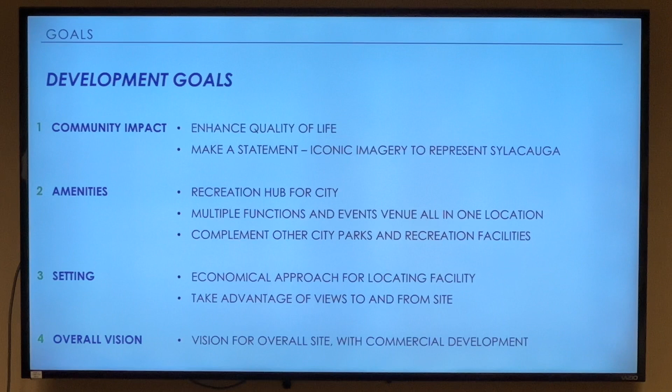Then from a setting perspective, we need to make sure it's an economical approach for the city and for where it's located—you'll see some of that in our thought process. And then take advantage of views to and from the site. The overall vision for the site, make sure we have an overall vision. One of the things we looked at was the potential for commercial development on that site as well.

So connectivity—if possible, extend walkable connections to and throughout the site. This is really part of an overall parks system, so making sure it has that feeling would be important. Vehicular access, make sure it's safe and easy to understand how to get to the facility, with adequate parking.

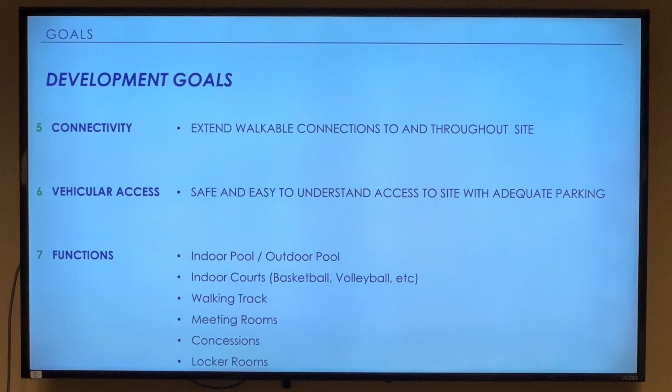Then lastly, some of the functions—we have a whole spreadsheet with square footages, but at a high level, looking at an indoor pool with an outdoor pool that could be in the future or now, but planning it so it could be implemented at any time. Indoor courts that would serve primarily basketball and volleyball, though it could serve other things as well. Walking track, meeting rooms, concessions, locker rooms, as well as associated administrative space, support space, and storage.

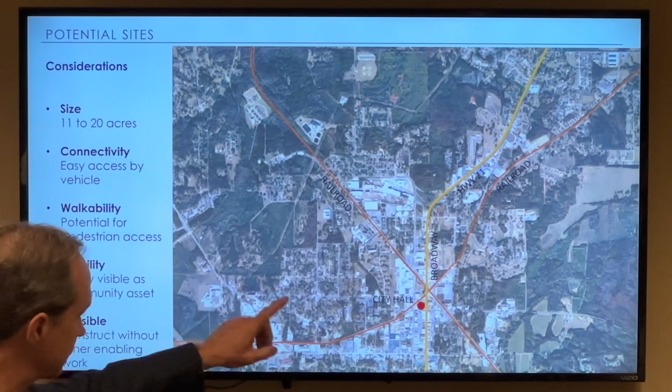So when we looked at development options and potential sites, this is just high level—this is where we are, the red dot right now, City Hall. Some of the things we looked at for this size facility, the square footage and parking we need, is acreage of 11 to 20 acres to really do something appropriate.

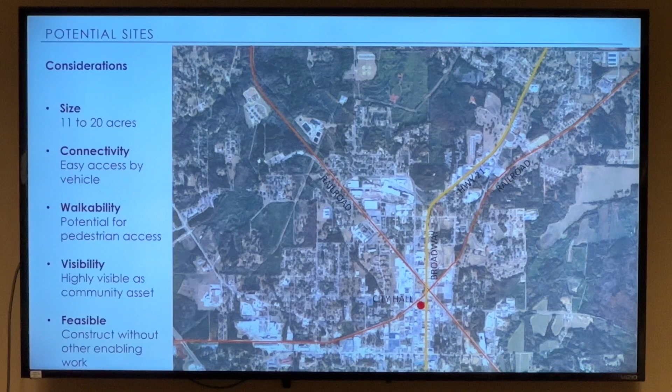The connectivity should be easily accessible by vehicle, with potential for pedestrian access, and should be visible as a community asset, hopefully something everyone would be proud of. Then feasible—it should ideally be feasible without requiring a lot of other enabling work, such as massive utility infrastructure extensions or things like that. That's part of what we mean by enabling.

So we looked at different sites, and as we talked about last time when we provided an informal update, we did look at this area just north of us at the turn of Broadway and 21, where Central Avenue is, as a study area. This is the large area in yellow that we looked at, and the development considerations and vision included community impact, access, visibility and prominence, making sure it can be a hub of activity, pedestrian connectivity if possible, future growth, the real developable area, and earthwork or development ease and cost.

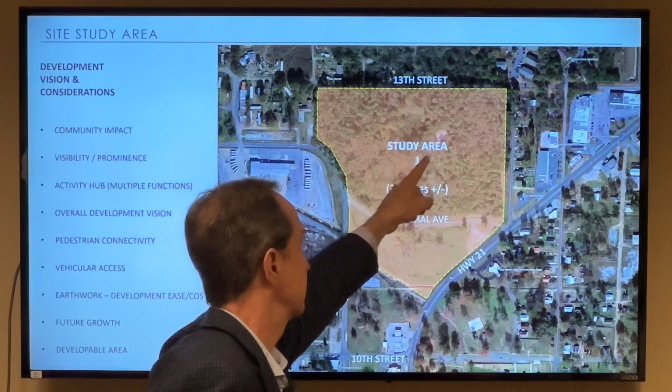So the first area we looked at was just north of Central Avenue, Central being right here. We did look at some of this area just south of it, but it's about 30 acres. What's interesting though is, as you know, there's quite a hill there—a big hill, this is the old water tank right there, and this is the top of the hill.

So once you get immediately north, or uphill, of Central Avenue, the site just starts marching up the hill. We did several studies looking at all of these considerations, how to fit the size of building with the functions we're looking at and appropriate parking, with future expansion space for an outdoor pool or outdoor play into this area. This is one of the schemes we did, where we looked at putting it just north of Central Avenue—it fits, it looks good. Then we look at a section cut through the site, which is what you see here.

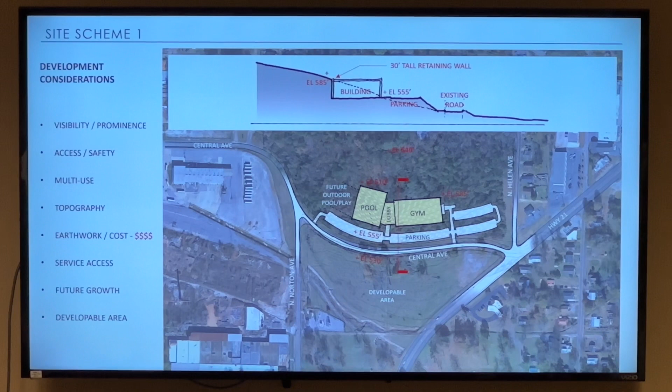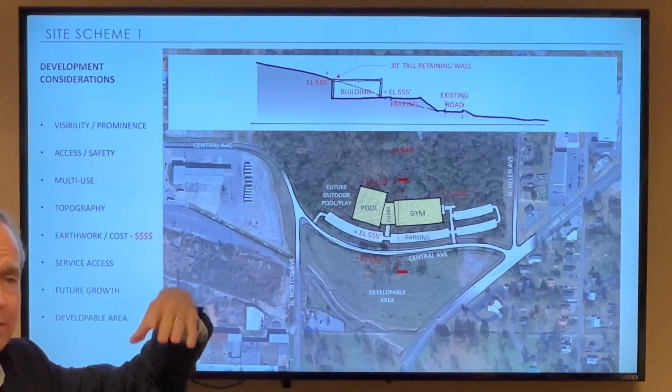And the wrinkle is we would be building into the hill. So we realized this is really expensive. Here at the back side, given the size and footprint of the building, we would be digging in and creating like a 30-foot retaining wall, say for the back of the gym or the back of the pool structure.

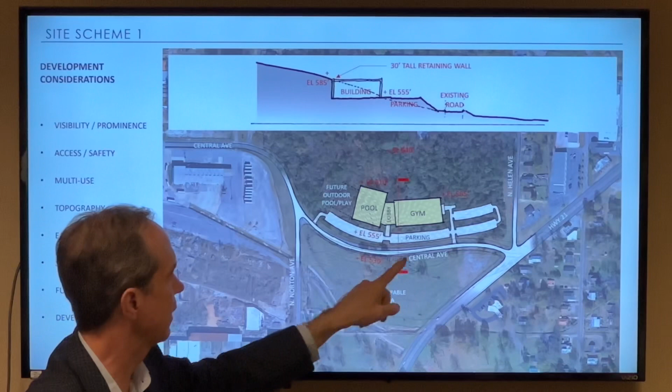And that would still only be to the top of the building. This is the existing road right here. So what we realized, we developed a lot of different schemes, but we presented 4, thinking surely there's a way to do this that would not be as expensive.

We looked at this scheme, or one similar to it, that was number 2. This one, actually, there's Central Avenue here, so we kind of pulled it down the hill some. But you still had a 25, 30-foot retaining wall.

Then we even looked at going on top of the hill and just slicing off the top of it. It's more earthwork, but you create a flatter area by cutting off the top of the hill. That made parking kind of problematic and difficult, and also it's expensive to move all that dirt.

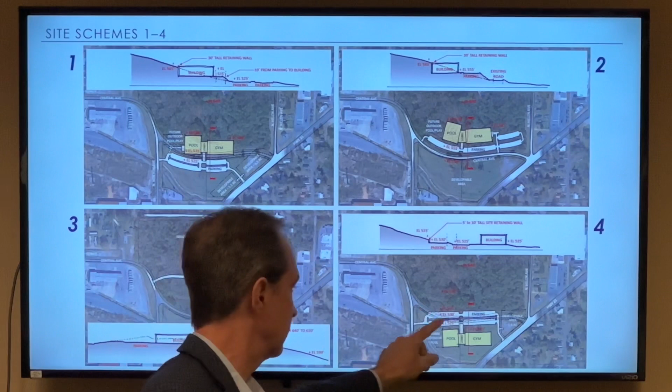So then this 4th one, we said, all right, we've moved all around the site. Let's go south of the site—south of Central Avenue, I'm sorry. This is Central right here. So we put the parking there, and then sketched the building right there on the flatter area.

And that was really kind of a light bulb moment, in that money is always an issue. Is there potential opportunity here to locate the facility down in the flatter area that would be a more economical approach?

Now, one of the things we talked about and knew was an important consideration was that this is a potential future, whether short-term or long-term, tax revenue producing property. So in some of these schemes, we showed a developable area that could be sold off or long-term leased, as an out parcel or commercial parcel, so to speak.

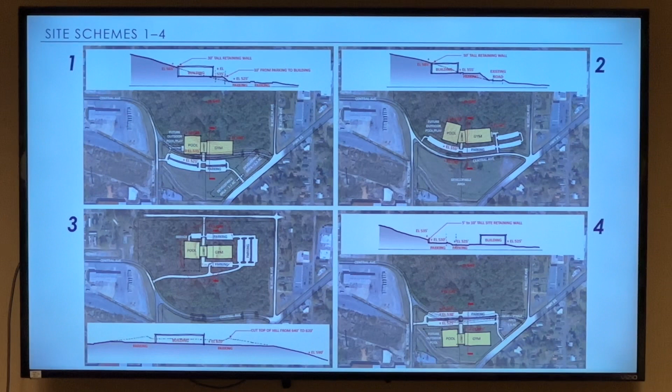And we tested that because we should not and cannot just not hear that. So what we came to, as part of our ongoing thought process, the outcomes from those first 4 schemes were that it is feasible, anything is feasible, to build into the hill, but it would be expensive, and money really talks—the city would be spending a lot on excessive site work, excessive grading, and really tall retaining walls by going into the hill.

So that led us to consider, can we go down the hill south of Central in this area, to be in a more flatter area. Of course, to be honest, we were concerned it's hard to fit the building size, the appropriate parking, and commercial property in that area with it feeling appropriate and not shoehorned in.

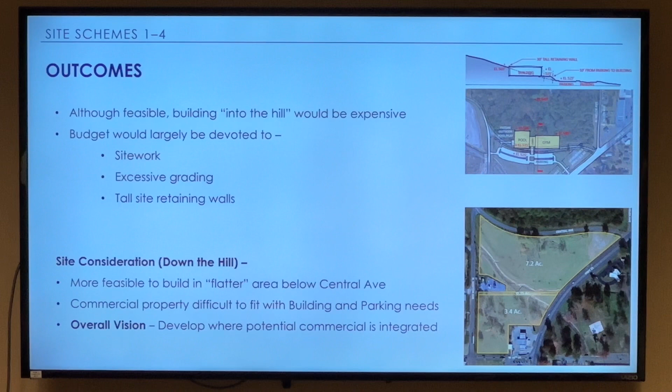And so we said, our challenge is, can we look at it in a way where an overall vision is created so that the rec facility with its parking and a commercial property all works harmoniously.

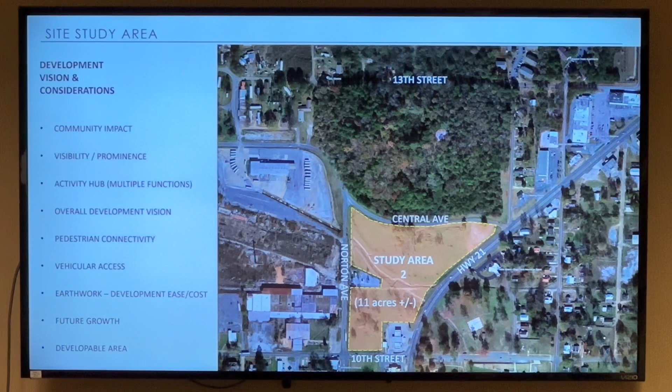So we then studied this area, which is about 11 to 12 acres, depending on how it's calculated, but we thought it was a worthy challenge. In this discussion, we started talking about maybe this could be a planned unit development, a PUD, where within zoning we could create an overall vision for this property that has a more consistent, harmonious vision for the rec center and any commercial development, so they work hand in hand together.

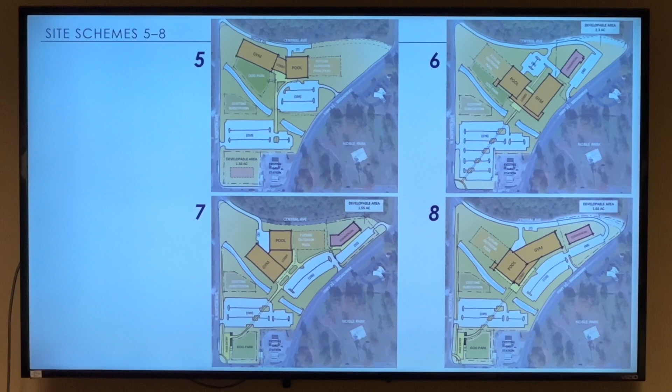We gave ourselves a challenge and said, let's do schemes and see if we can make this work. So we had schemes 5, 6, 7, 8 here, and I won't take you through all of them—I'll jump to the end at a high level. We moved the building and parking all around the site, but landed on scheme 8, with parts of scheme 7 and even parts of others, as a next step that seems to have some potential. So call this scheme 9.

I'm excited about it because I think it has a lot of potential to really think of this whole property as an overall vision, a planned unit development, so to speak, where we could create a master development plan that has consistent planning and some level of coordinated image and character. It also combines park, recreation, and commercial uses all together, and really thinks about harmonious land use, ease of circulation, easy to understand, appropriate parking, visibility, and pedestrian connectivity, and lastly, integration with everything north, south, east, and west.

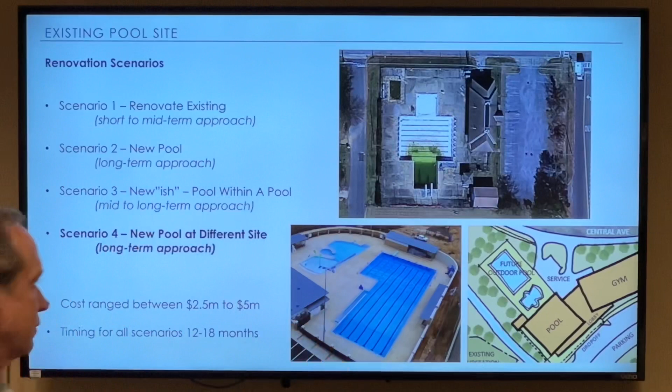So that's just a snippet of that sketch, and this is an example of an outdoor pool. It can be a lot of different things - leisure, competition, laps, whatever it may be. So that's kind of what we looked at there.

And then if the pool were to go to a future site, this property, because of its LWCF designation, does need to remain Parks and Rec related.

Could you get more pickleball courts? Maybe, but you want to make sure there's enough hang out, linger, social space, because that's a big part of what pickleball is.

So all that to say, propose next steps, and then I'll be quiet and love to hear from y'all. As we looked at various sites and locations - I think we said this last time - almost any property in the city would require either conditional use approval for this type of function, or a rezoning.

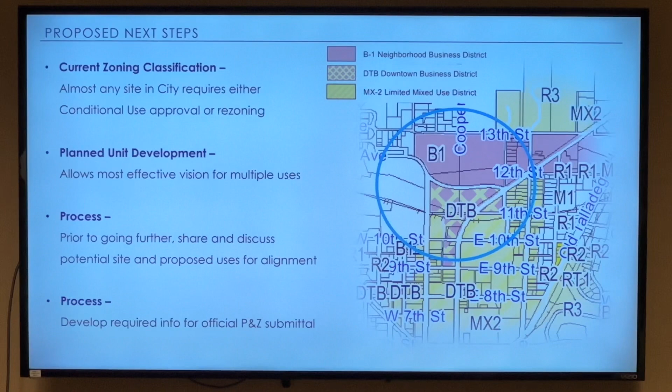Yeah, I'm glad you brought that up, I'm gonna go back. There could be - I mean, the city has this property, you could do some townhomes or single family. I think going up the hill, it's easier for a residential developer to do that.

But there very well could be single family homes here, but given the topography, it might make more sense to do a fourplex type thing, grouped together. So I'm glad you brought that up - what do you need to have for a planned unit development? Do you have to have residential in it, or can it just be a mix of recreation and commercial? Whatever you decide, but once it's approved as a planned unit development, it can't be changed unless it goes back through the whole process. So if you say the commercial has to be this high, this aesthetic, once it's done, the only way we can issue a permit is by the planned unit development. It's sort of a zoning unto itself.

It can't be changed, right. Well, I'm glad you brought that up, Matt. I like the idea. I know townhomes in any municipality can elicit a lot of different responses, but I like it. Once we realized the footprint of this facility is so large that it makes sense to build it in the flatter area, we were more constrained, so we thought maybe it'd be more effective not to be hamstrung as part of a planned unit development. It could be, if that were part of the overall vision, and we could show y'all that.

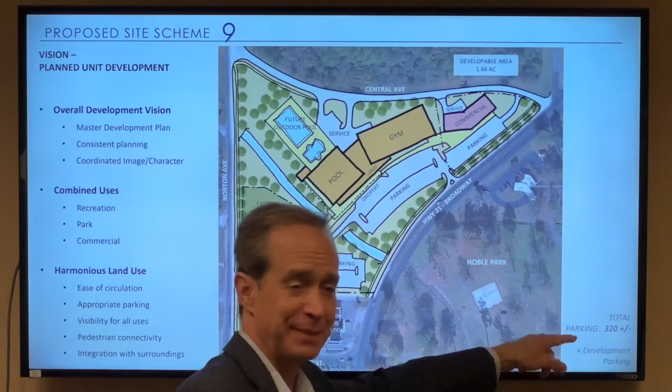That's a good question, thank you. Any thoughts, comments, observations? How many parking spaces are you thinking about? The plus-minus is really important - we've kind of sketched around 320, plus at least 5 per thousand square feet for the commercial.

If it's office space, you can get away with less than that. If it's dining, you want at least that much. If it's some other retail or commercial space, 4 or 5 per thousand square feet is appropriate. So when we say 320 plus or minus, we come up with our numbers and then start subtracting for ADA spaces that take up more room, or how big the drop-off really is - things like that. We want to build a little wiggle room in there.

That was part of the challenge - at first we were just like, this doesn't work. But when we started looking at connectivity, it really helped. We said, all right, how many people are at a basketball game? How many kids, plus refs, then you've got parents, then maybe grandparents, or maybe parents come separately - who knows, 2 teams, 2 courts, 3 courts, whatever it may be.

And then you could have people in the pool. So, you start multiplying all that out, and that's how we came up with that range of numbers.

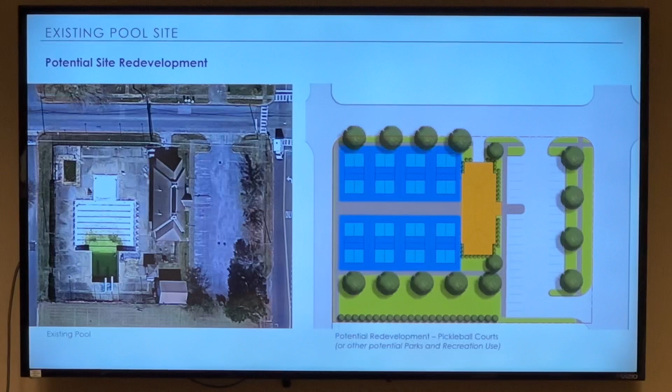Hey, while we're on the subject, can we flip back to the pool site? Because we have a couple of council members here. We have a group of people in our community that ask a lot of questions about the pool site.

One thing I wanted to make sure we understand is in scenario 1, renovate existing pool, and then the pool within a pool was scenario 3. Our existing pool isn't deep enough to dive and swim in for competition. Even though we've been doing it for years, the pool is too shallow.

So if we renovated the pool to good current status, there would be no swim team associated with that. A lot of people thought let's fix the pool and we can get swim team back and going. That's a good goal, but it doesn't make sense — it doesn't meet the specification for that.

Did it meet spec when it was built? Let me tell you a funny story — when the auditor came, he was like, this pool's not deep enough. We said, what? And he said, no, it's not deep enough. It's supposed to be 5 feet.

I think it's 4 feet — that was the second thing he said when he walked in the room. So he just pointed to the concrete, and right next to one of our diving stands, the starting block, it says no diving.

I don't know how we held competitions for probably 13 years, but we did, without incident. A lot of people ask questions about the pool site.

I think that's an important detail to understand about scenario 1, just fixing the pool as is. It seems like the cheapest route, let's get it going as quick as possible, but it wouldn't allow us to have a swim team. And as y'all know, I've been that guy saying leisure pool, let's fix this spot. But when you're looking at $2.5 to $5 million to fix a 1980-something pool, it doesn't make sense.

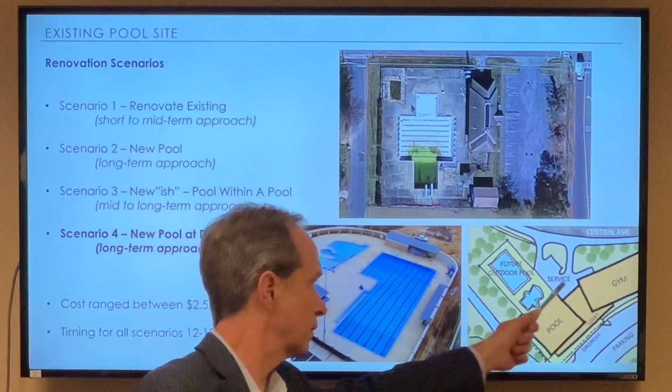On that scenario where we show the rec center and an outdoor pool, we did say future, but it doesn't have to be—you could do that now. It could be designed and bid out so that while contractors are working on all the other stuff, you could open that pool. It would not be totally ideal, but it could be done.

Is there a general cost range, again, to make sure that it fits in a funding envelope? For the pool or for the overall project? The whole thing, if you were just assuming you're gonna do it all.

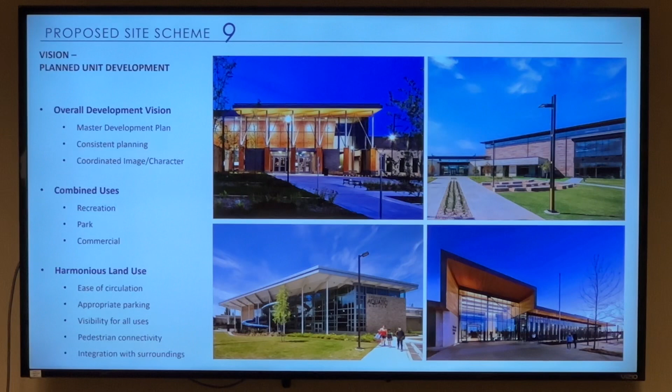Not yet. Honestly, we kind of started to get numbers together for this, and we just kind of said 40 million, 30 million, 22 million. It's probably not the last one you said, but it'd be nice if it weren't the first one you said. So 30-ish might be reasonable?

Maybe, yeah. But, to be honest, y'all are a group of people, y'all might look at this and say we're all crazy, and we need our cost estimator to try to provide better numbers, better order of magnitude costs. So part of this is to make sure we're on the right track.

But then that really starts to get into various decisions. Like when we looked at this gym, we want to look at it with 3 courts, but we know we could pare back to 2 courts. And so we want to be able to provide a range of costs there.

Or the outdoor pool, like we sketched—that's a big pool, potentially 50 meters long, plus a leisure pool. Sorry, that's 50 meters that direction, and that's the leisure pool, 25 that direction.

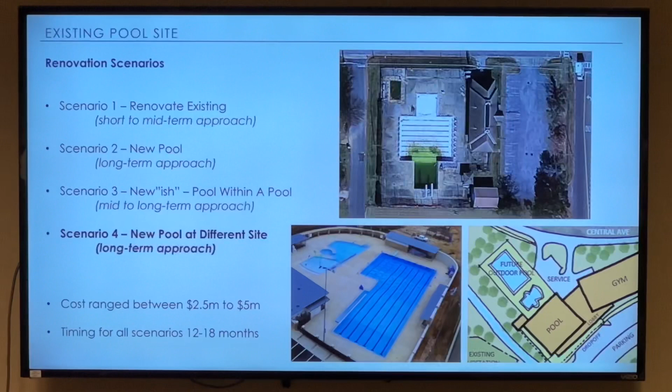So those are big cost decisions, and I think we need to drill down better with Parks and Rec and the city to say what's the likelihood of these various things, and then provide y'all with a better order of magnitude cost. I think that is one of our next steps.

I didn't put that on the next steps, but that would be something, because if this is a feasible approach and we start going through an actual P&Z process, at the same time we would very quickly come up with an order of magnitude cost to make sure it's feasible.

Parenthetically, if we could do some sort of public-private partnership for residential development to take the northern part, going out to the Comer ball fields, above and through the old Avondale property where we already own the roads, and have some options to get land—using the public-private partnership as a way of making this a joint project that included the desperately needed housing—it would all glue together and fix all of that mess, and we'd have a whole new ecosystem of everything all together.

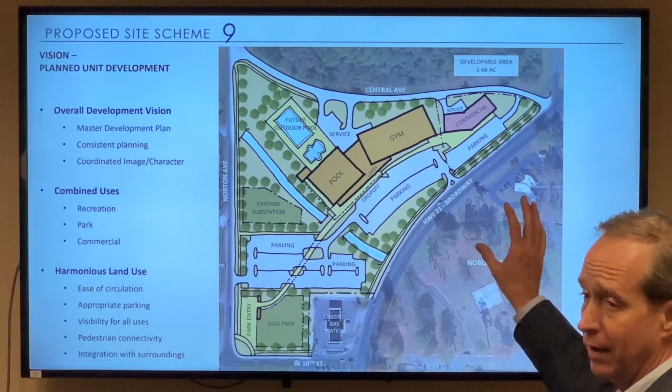Do you have an appetite to build it? Yes or no? Or do you have an appetite to build part of it? Your charge as a city to us could be, figure out how to phase this and build half of it first or something. I think our key's gonna be to phase it so we can phase the bonding. We've got the revenue coming in to pay it, but to get it completed, we need to have it in pre-approved stages.

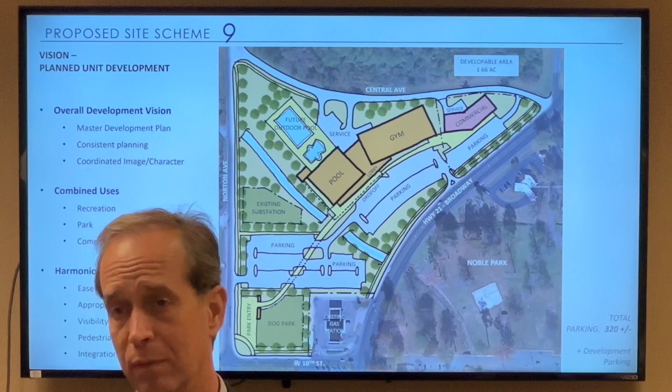So I think parallel track of those 2 things, we don't need to do that extra work and provide that cost if the site, in an official manner from a planning and zoning perspective, isn't gonna go anywhere for some reason. So we'd be working those parallel, because before we enter into full design phase, we need to be able to say it's gonna be X. Do y'all wanna do that? Can y'all do it? And how do we do it? And we can be thinking about phasing and things.

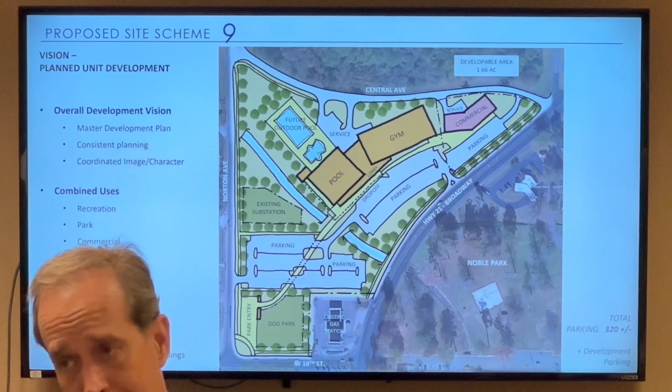The order of magnitude cost on that site versus the order of magnitude cost north of Central Avenue are 2 completely different numbers. We looked at that site and it was massively different. I do have a question - your pedestrian connectivity, where are you thinking the pedestrians will be crossing to get there? Cause safety's a big issue that planning and zoning is supposed to be considering.

Can I answer that as the guy who walks every morning at 5 o'clock? Definitely on Norton. You're not gonna cross in front of Jack's and the gas station - the sidewalk's already on the other side of Norton there. Now, obviously it could be improved drastically, but if this was completed, you could walk from behind there all the way to the end of Norton.

I just wanted to make sure you weren't trying to do something over on 21 or Broadway, cause there was talk about a red light and all that previously, and I was hoping it was Norton. I had made the comment when all this sidewalk stuff started, when I walk at 5 in the morning, I don't even go in front of Jack's. I go ahead and cross by the creek over there to get to Noble Park, cause that's a busy little section, and they're slowing down off 21 or shooting in front of another car off 21. But by the time you get to Norton back there, they've had time to kind of gather themselves.

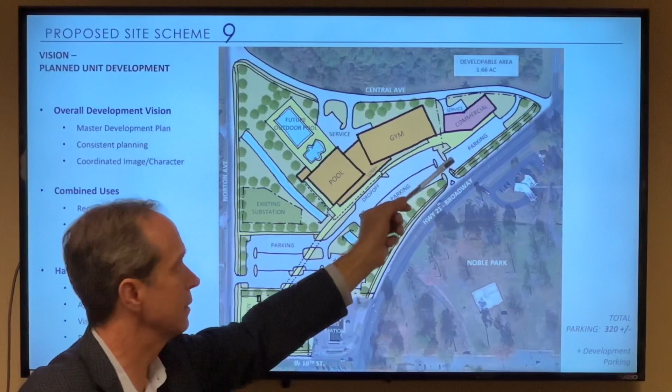Then I think site planning, like, if this were way out here, and somebody came in and said we're gonna flip the parking and put it behind the building, all of a sudden that building is blocking the view of your really expensive, proud community building.

And then the third would be site access, doing it in a way that works for everyone and is easy to understand. To answer your question about whether a covenant can be put in this subdivision: when you do a PUD, you can drill it down as far as you want, down to aesthetics, single shakes, whatever. If a developer buys that piece of property to develop it, they have to build according to what was put in that PUD. They can't diverge from that without going through the whole process again, which chances are they're not gonna do.

And that's enforceable by the city. We don't issue a permit unless it meets what's in the PUD.

I think what's really exciting about this is you do want it harmonious, and the proximity is kind of an economic engine. People will come because they're coming to the rec center, so to me it becomes a really attractive proposition for a developer. A developer's first look at Sylacauga is probably going to be on 280, and then go from there, but you're creating a magnet here, so this would be very advantageous for a developer.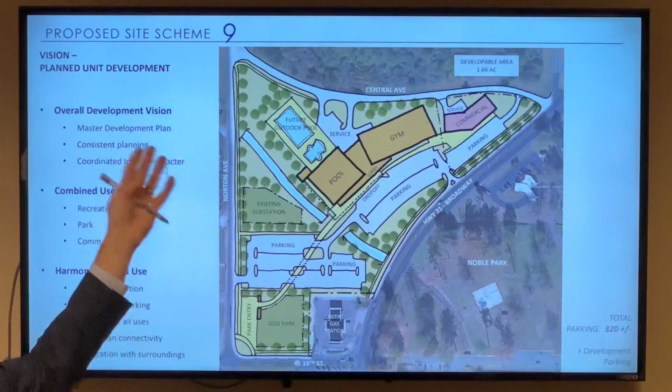So my thought, recommendation or question here would be: we can totally sketch that up, but would it make more sense to have that as kind of a separate effort, done in a way that plants seeds for the city, so that this development isn't hamstrung by that, and it's just contained by these four roads. Does that make sense? Yeah, that makes sense.

But we could totally do a quick density study as part of this, so it could attract developers and go residential over here, and do some character and image examples - townhomes, 2-story, 3-story, whatever.

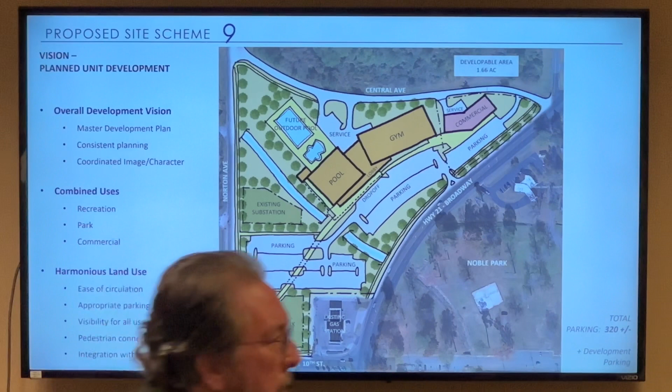I think the council and the planning commission, from looking at what comes up asking us for places around town - I think if you hamstring the first part of it, and you already had it created into a subdivision, this person's buying something that's ready to build on, versus going through an approval process and getting it zoned the way it needs to be zoned. If nothing else, the part that touches that - and what Lee alluded to earlier, maybe the back of it is a general overview, just come to us with what you've got - but I really think the part that touches it needs to be hamstrung a little bit.

You mean that right there, along Central Avenue? Yeah, but as far as residential is what I'm talking about. Oh, okay, I'm sorry, I meant residential, I thought we were over the commercial. So like if it were to go out over here, or just take the whole north front of Central.

Yeah, I'll figure it. So you're saying they're more likely to develop if they put the residential in the PUD? Is that what I'm hearing? What you're doing is going ahead and creating a ready-to-build subdivision, so as soon as they buy it and make the deal, they're ready to build, versus what you just went through downstairs.

But not having a developer isn't going to hold up the development of the rec. No, hopefully the city won't be building houses - I do hope that. Well, I'm just saying if they don't find a developer to buy the land and develop it, that's not gonna hold up the rec. No, it just gives them something ready, and that can be a phase in the PUD that doesn't have to be done right now, but on paper it's ready to go - future use. Okay.

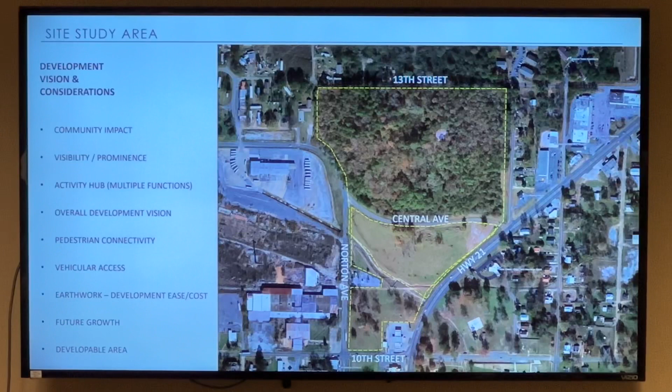Well, thank you. That's exciting. Appreciate it. Yes, thank y'all. Yeah, very much.